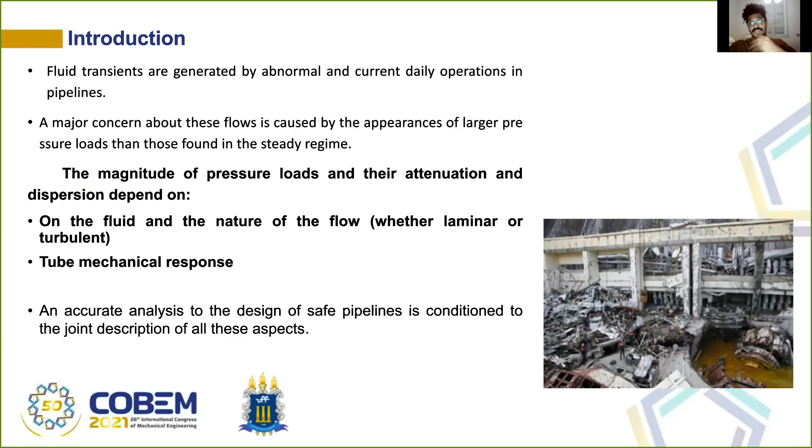Here is an example of a tragedy that happened in Russia in a hydropower plant, and the onset of this destruction was an uncontrolled fluid transient. So, historically speaking, some known effects that happen in the transient flow were disregarded because of the complexity of the modeling. For example, the anelasticity of the compliant pipe, such as viscoelasticity, the mechanical behavior of the pipe, and fluid transient friction. But those phenomena are known to add dispersive and dissipative effects on the fluid pipe system.

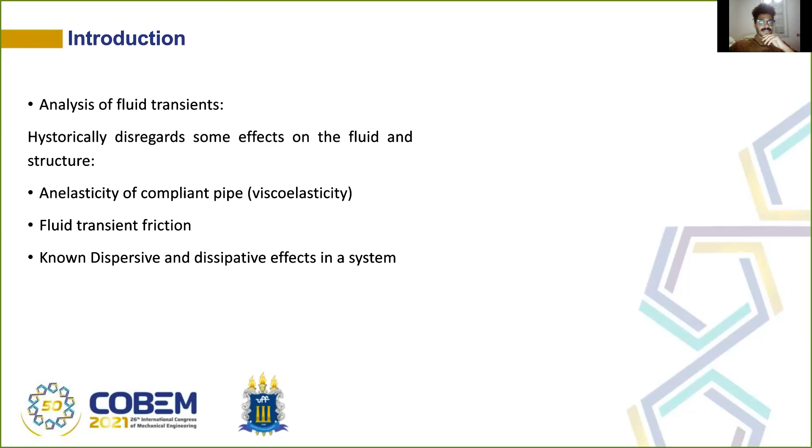Just to introduce an example of that, we will see in the next slides, for example, the analysis of the fluid. Classically, they use the quasi-steady friction modeling. That means that they use the same equation of friction of a fully developed flow to model the transient friction.

But as you can see here in the figure on the right, of the pressure response by time, the comparison between the experimental data and this modeling reveals that this kind of modeling overestimates the pressure, and the pressure responses are not in phase with the experimental data. And why does that happen? Because this kind of modeling cannot see local and two-dimensional effects that happen in the velocity profile during the transient. For example, you can see this left figure here. Here is the velocity profile before the transient, and here is the velocity profile after the beginning of the transient. So velocity gradients appear next to the wall, even though the average velocity of the flow is null. As the quasi-steady friction is based only on the average velocity of the flow, it can't see this friction that is happening here next to the wall.

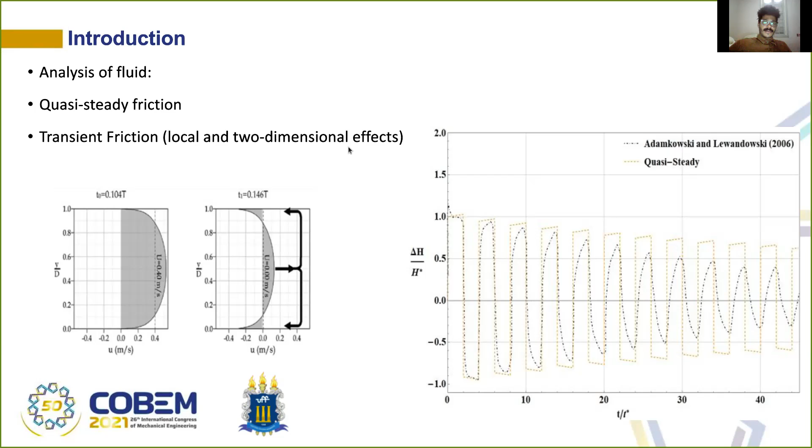Depending on the type of application, tubes are made of different materials, giving rise to different mechanical responses. For example, typical industrial pipe systems are made of steel of different carbon contents, and this kind of pipe falls into the category of linear elastic mechanical response. Sanitary sewer and water supply pipes are commonly made of PVC or polyethylene, which fall in the category of viscoelastic mechanical response. So depending on the application, different responses of the tube actually happen. And what is the influence of that on the transient? This work will just give a glance at this effect.

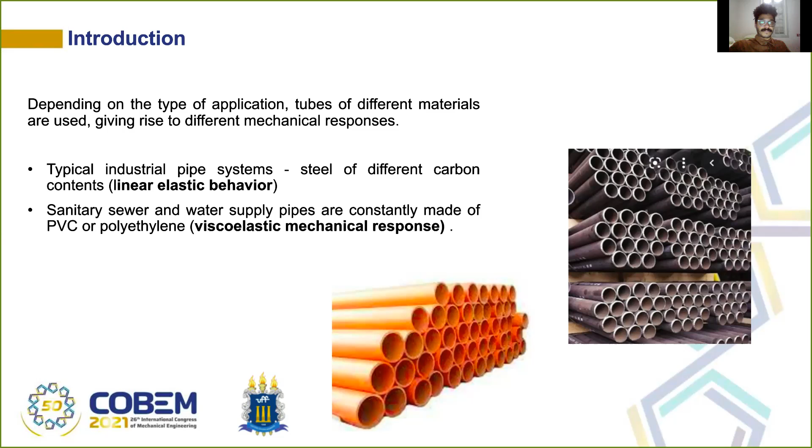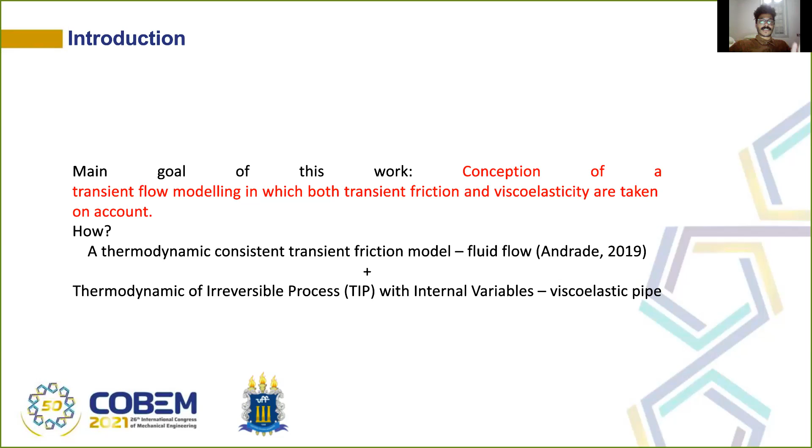The main goal of this work actually is the conception of a transient flow modeling in which both the transient friction and viscoelasticity are taken into account. How? A thermodynamically consistent transient friction model for the fluid, developed previously by one of the authors, and to treat the viscoelasticity of the pipe, we will use the thermodynamics of irreversible processes with internal variables. We will take it slowly to get all the details of this model.

First, the consequences. We will see the influence not just of the transient friction during the transient flow, but also the influence of the viscoelasticity in the mechanism of the fluid transient. And as the model is based on a solid thermodynamic framework, we will be capable of computing the dissipation in the fluid and in the pipe. I think it's the first time in the literature that the dissipation of the fluid and the pipe is explicitly computed in this field. And this set of characteristics can be used as a sound tool for practical and theoretical further analysis of hydraulics.

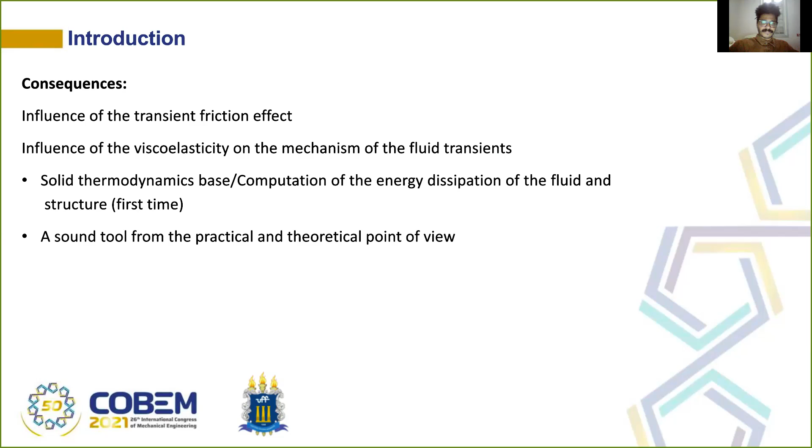So, the mechanical model formulation. The standard phenomenon to be analyzed here is a laminar flow inside a slender compliant pipe. The fluid is viewed as quasi one-dimensional, but it is viewed as a structured mixture formed by structured shell-shaped constituents. That is, this structure is just to capture those velocity gradients that I showed in the previous slide.

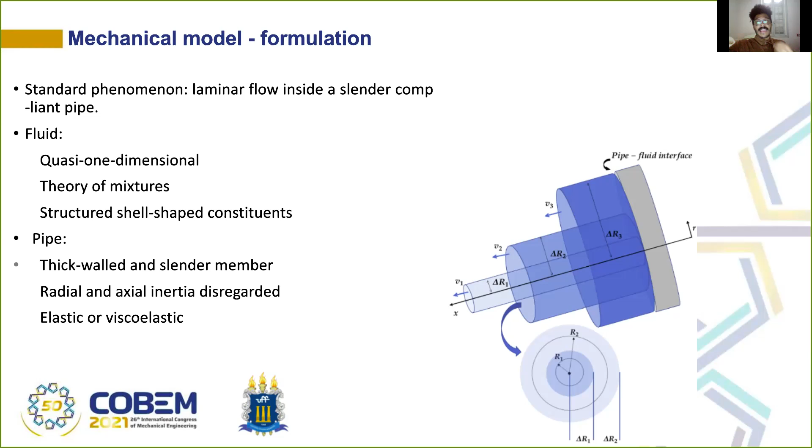The pipe is assumed to be a thick-walled and slender member. The radial and axial inertia is disregarded, and the pipe can be elastic or viscoelastic. The idea behind the conception of the mixture is this: you can see here the velocity profile during the transient is in this structure that I show on the right, formed by constituents concentrically shaped, shell-shaped, and organized in the radial direction, just to capture the velocity profile that happens during the transient, and then the transient friction is captured with accuracy. As a result, we can find a better picture of what is going on in the transient phenomenon, for example, the mean pressure or mean velocity.

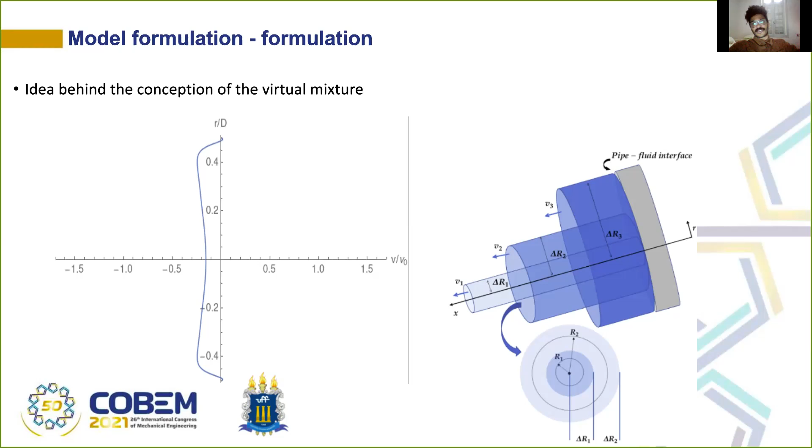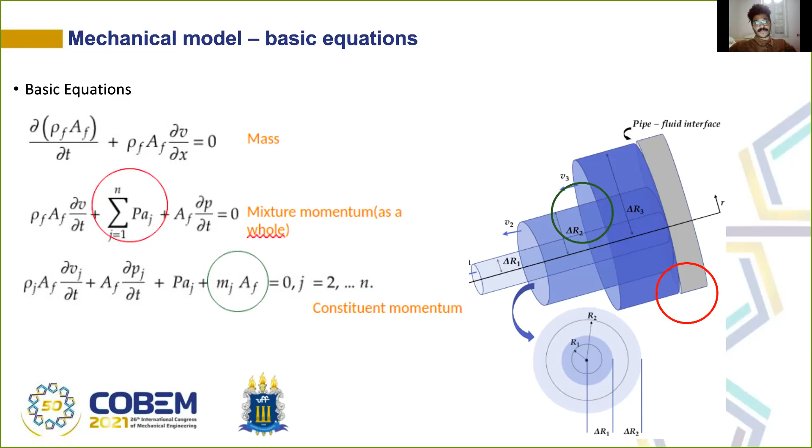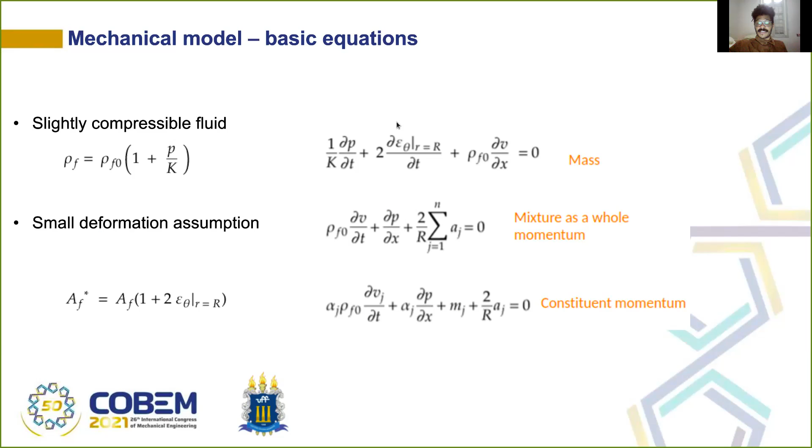Okay, if you assume that the fluid is slightly compressible and that the pipe is in the range of small deformation, we find those basic equations. As you can see here, there appears the circumferential strain of the pipe. And as I said, we need constitutive equations, for example, for the interaction forces that happen in the fluid, or as we can see here, this abstract mixture, and we need constitutive equations for the pipe. So first we will explain the fluid constitutive equations.

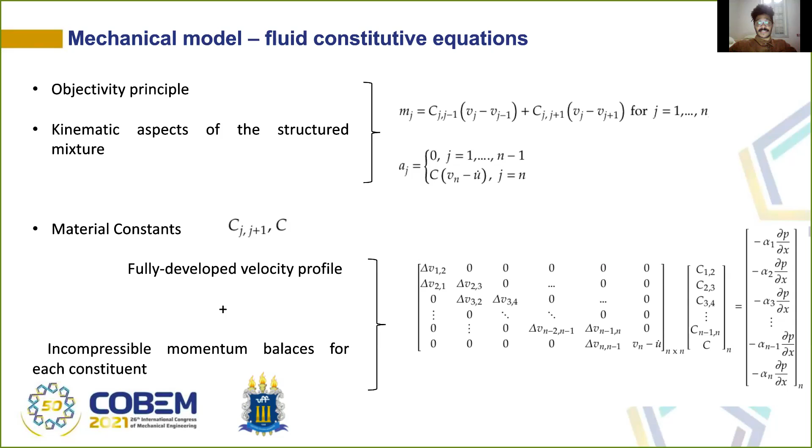We postulate those constitutive equations by appealing to the objectivity principle and the kinematic aspects of the structured mixture. That means that the constituents can slide upon each other in the direction of the pipe center line. So we come up with those equations. The material constants of the model are found with the aid of a fully developed velocity profile and with the incompressible momentum balances for each constituent. With those, we have a linear system whose solution gives the material constants of the model. For this kind of modeling, in which the fluid flow is laminar, those material constants are given by expressions that are positive. And that is important because we will see later that that is a sufficient condition to obey the second law of thermodynamics.

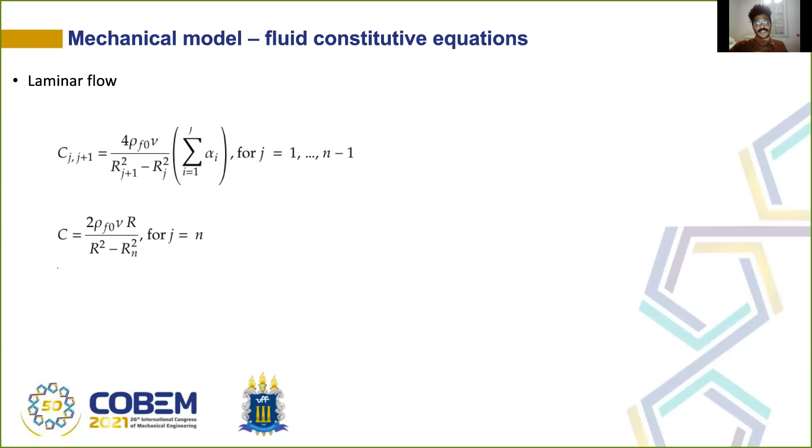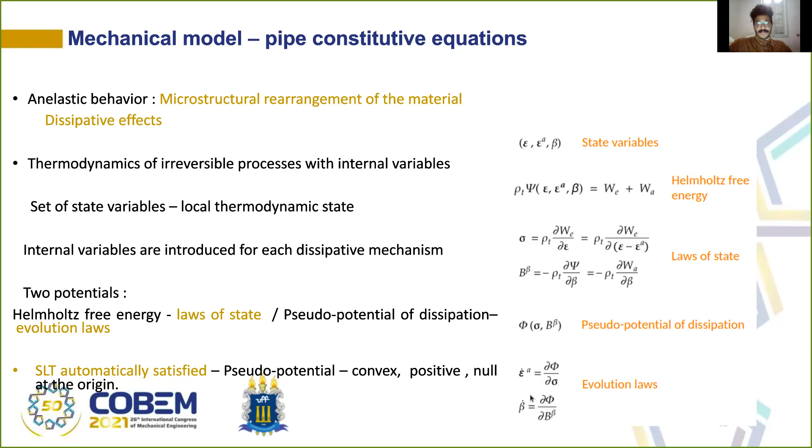So for our case, where the solid is viscoelastic, we assume that the anelastic response is purely deviatoric. The solid is isotropic. The model of viscoelasticity applied here is a generalized Kelvin-Voigt model. And with that, we found the laws of state of the material, in which this one represents the purely elastic response. Here, with this pseudo potential of dissipation, you can find the evolution laws of the material that represent the viscoelastic response of the material.

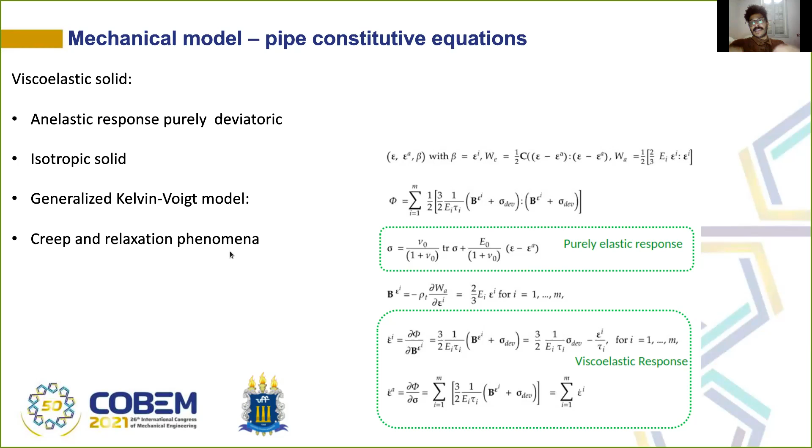And with this framework, we find the creep and relaxation phenomena that are found in viscoelastic materials. So the governing equations are found by combining the basic equations, the pipe constitutive equations just described, and the fluid or pseudo-mixture constitutive equations.

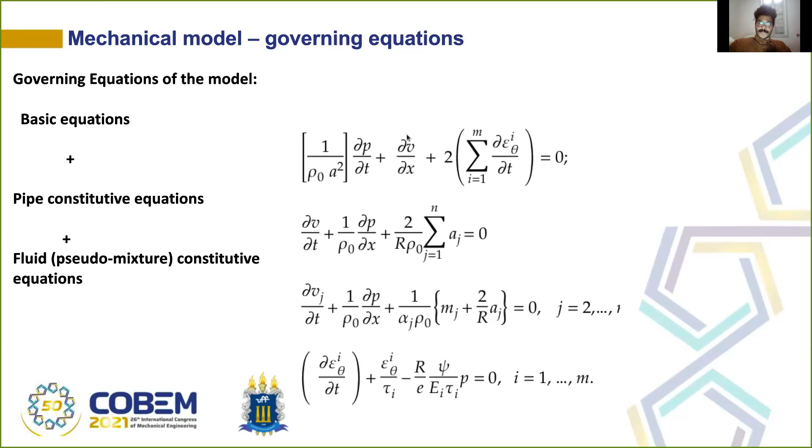And as we want to see the dissipation of the system, I put this slide here because I want to see the fluid dissipation and the solid dissipation. How can you do that? First, you postulate the principle of virtual power, then the second law of thermodynamics, the Clausius-Duhem inequality. Then you introduce the Helmholtz potential to eliminate the clearly impossible systems. Then you use the pseudo potential of dissipation to find the dissipative mechanism of each internal variable.

Then for the fluid, we find this expression for dissipation, and as the material constants of the model are positive, the dissipation of the fluid is positive. For the solid, it's clearly positive because the pseudo potential of dissipation postulated here is positive.

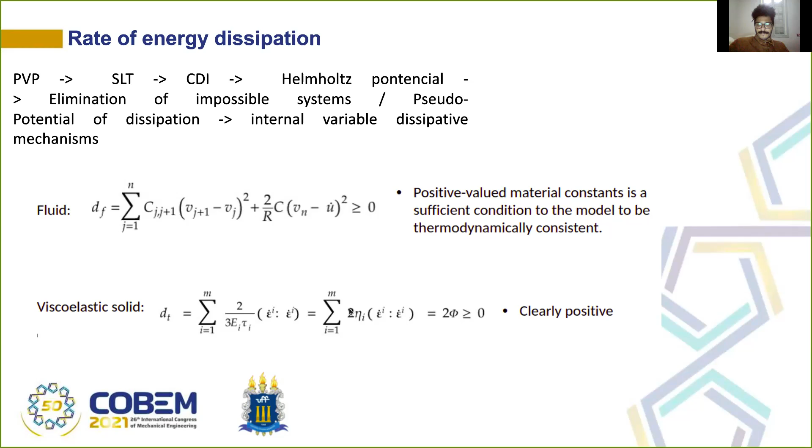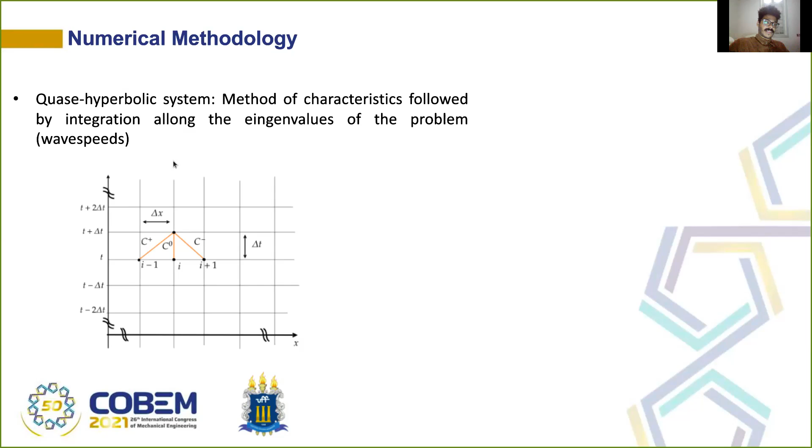For the numerical methodology, we applied the method of characteristics followed by integration along the eigenvalues of the problem, which are actually the wave speeds of the model. Here I just show the computational grid that we applied in this work. So we compare the response of the proposed model with the experimental data of Covas 2005, in which the Reynolds number is approximately 1,000. And here we put the proposed model for a viscoelastic material and the proposed model for the elastic material.

And here is the experimental data of Covas. So it's clear that the proposed model has similar responses when compared with the experimental data. If you compare with the elastic response, you can find faster damping and a delayed response. And it seems clear that the elastic case is not capable of representing the experimental data.

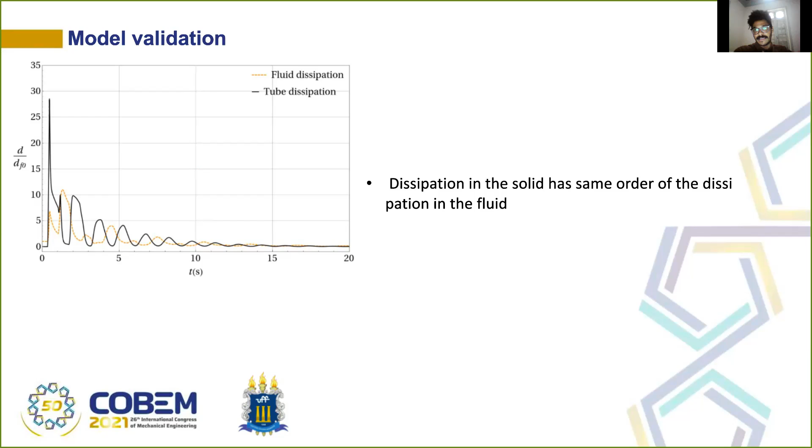And one of the main reasons why that happens is because, as you can see here, the solid and fluid dissipation over time that happens in the system have the same order of magnitude. So if you disregard the viscoelasticity of the model, you are losing a lot of information about the transient phenomena, since the pressure responses are influenced by the energy dissipation that happens in the system. So if you disregard the viscoelasticity, you are losing this information, and then you find that the magnitude of the elastic response is much higher than the viscoelastic one. In other words, the viscoelasticity of the pipe adds dispersion and attenuation to the pressure responses of the system.

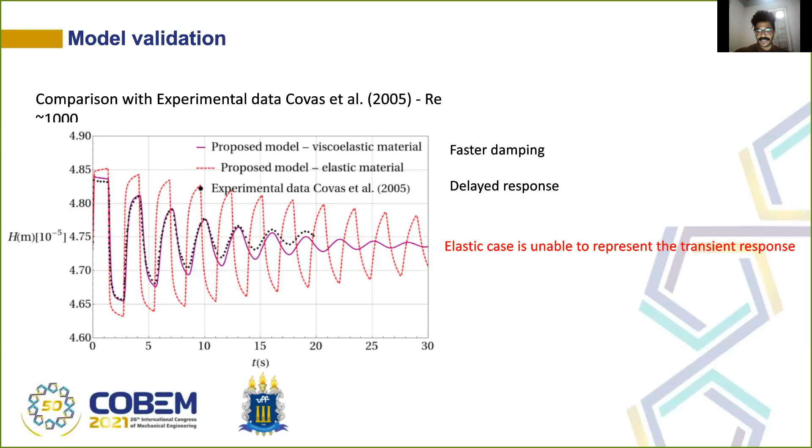So, concluding, a work has been presented that is an extension of fluid transient analysis in order to handle the viscous behavior of the tube. The model is thermodynamically consistent and capable of computing the dissipation of the fluid and pipe. The influence of viscoelasticity on the pressure response seems to be important, and assuming that the pipe is linear elastic is kind of far from reality.